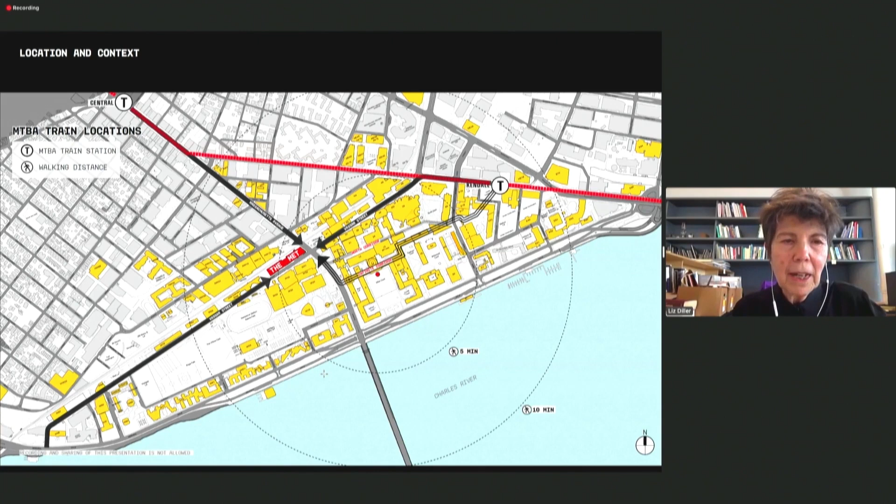As Hashim mentioned, it's sited right in the middle of campus. The prominent location on Mass Ave and Vassar will give the school a very strong presence, right in the middle, with a visible address. This is really the gathering place for all of these various departments, labs, and centers of the SA+P that are scattered all over, now brought into one very dynamic, state-of-the-art educational community resource.

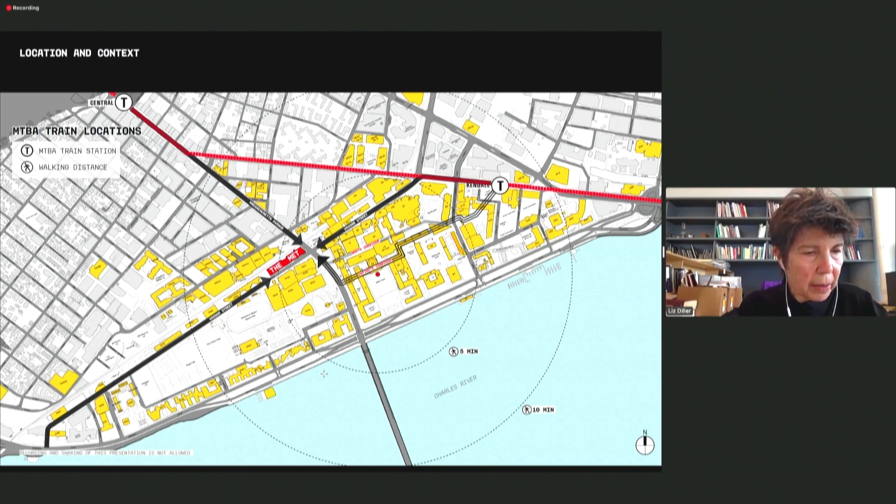I want to show this section next, to show you the character of this building and the challenges there are, but also the great assets. The building is very robust — it's almost an infrastructural cross-section. It has very distinctive masonry and steel hybrid construction, a very tight column grid, low floor-to-floor heights, and very small cellular structures through the building, which gives it a very high load-bearing capacity.

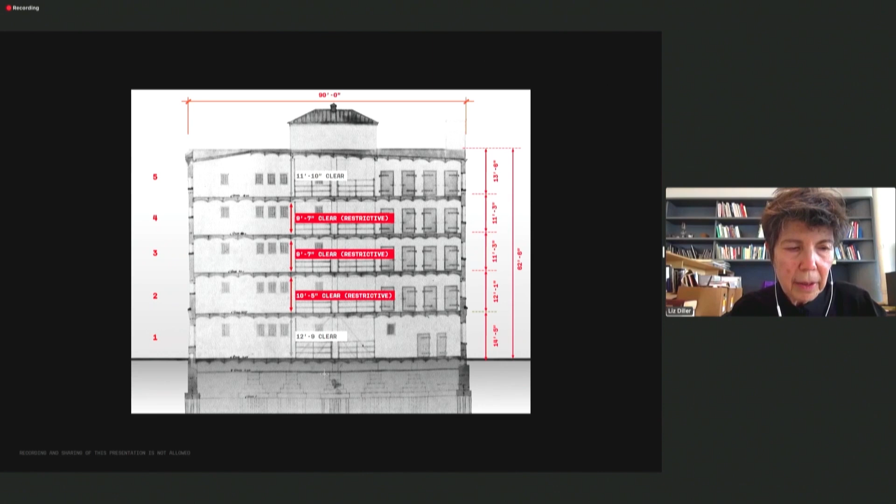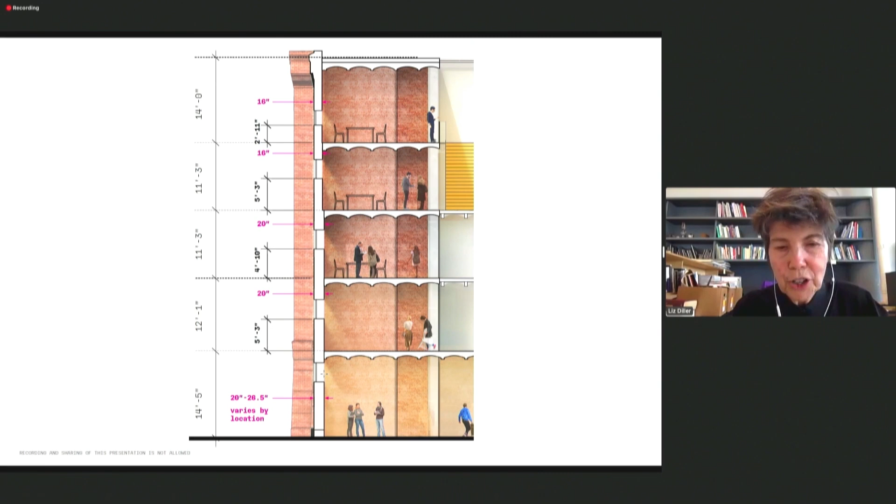The side walls are 2 feet thick, which makes it a great challenge for adaptive reuse as an academic building. This warehouse was designed for storing books, furniture, and pianos, but not humans. Chairs and tables don't require natural light or fresh air, but humans do. These tiny little windows — you see the arched brick ceilings, which are quite interesting — but the windows are very, very tiny, and we have to operate on this building to make it work as an educational facility.

So the effort has been to align the pedagogical goals of the school with this pretty unlikely host. Here, to reinforce, on the southern side of the building, you can see these very small windows that don't bring much light in.

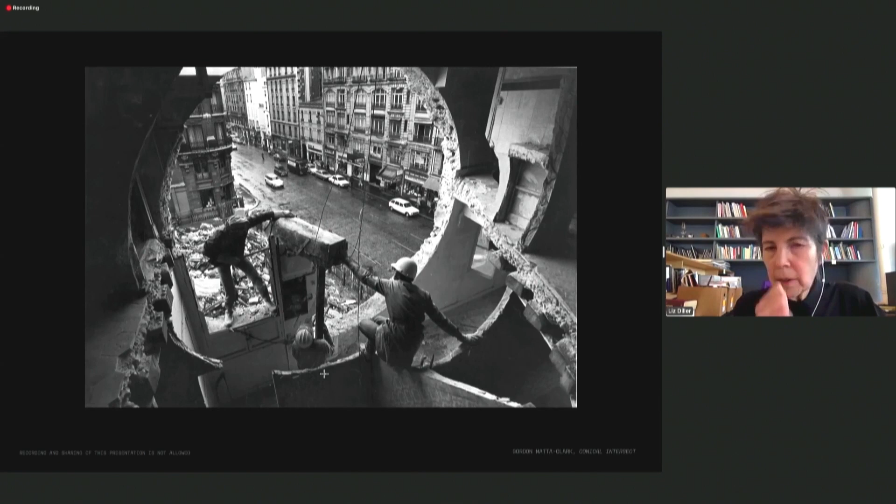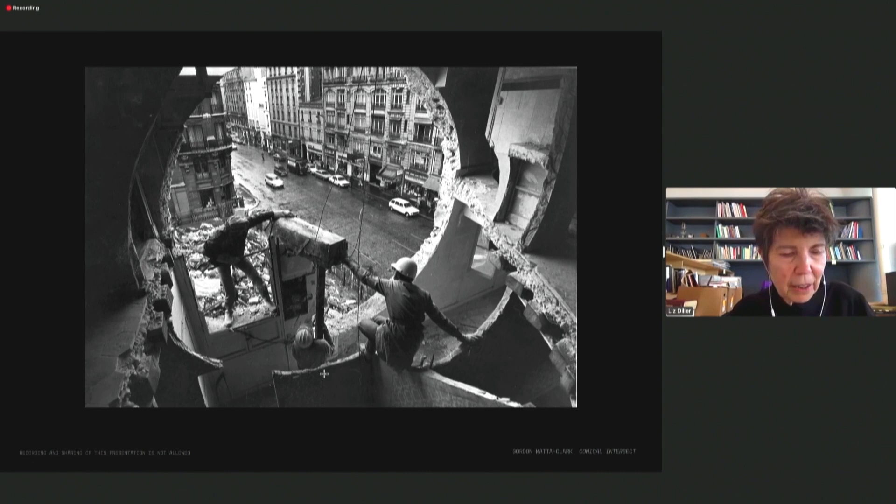For the project, we take our inspiration from Gordon Matta-Clark, and the way he fantastically cut large openings into buildings, for very different reasons than why we're doing it. But this kind of cutting into the existing fabric exposes the building itself and becomes a kind of pedagogical tool — it reveals its construction, but also helps create space and bring in light.

Because of the building's historical significance, the Cambridge Historical Commission asked us to largely preserve the Vassar and Mass Ave facades, and be very sensitive to preserving the building's character-defining fortress-like appearance. It's slightly paradoxical, but it leads to wonderful opportunities — like this kind of surgical cutting into the brick, to bring a window closer to where someone can really look through it, and wider, while showing how the loading of the cutaway brick is distributed through a steel frame, with the window sill sitting on that frame. So this becomes a great pedagogical opportunity.

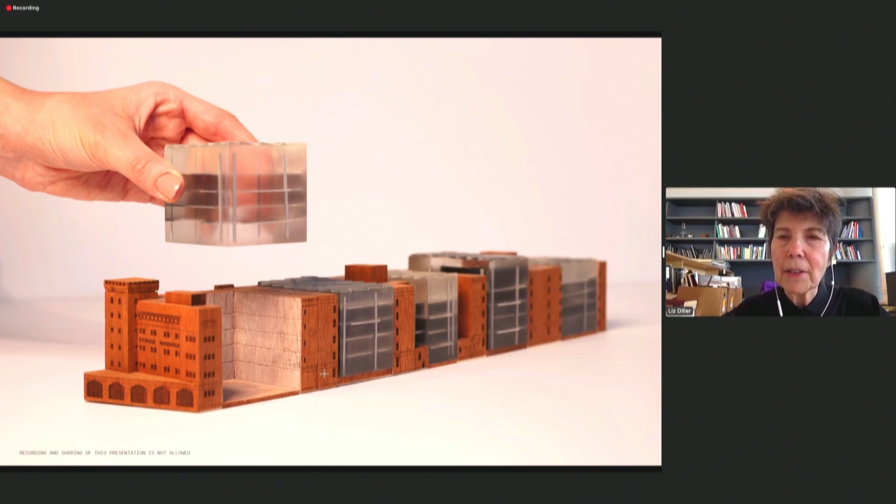And this is, ironically, the southern side of the building where all the sun is. So on the northern side, we have much more freedom to cut away more, cutting away large sections at a different scale.

These large interventions will allow us to preserve the fabric of the existing building, the cellular fabric, for some of the programs of the school, but also to allow large, uninterrupted, tower-like suspended studios that are state-of-the-art, suspended from the structural brick. These are column-free and will support lots of loading as well.

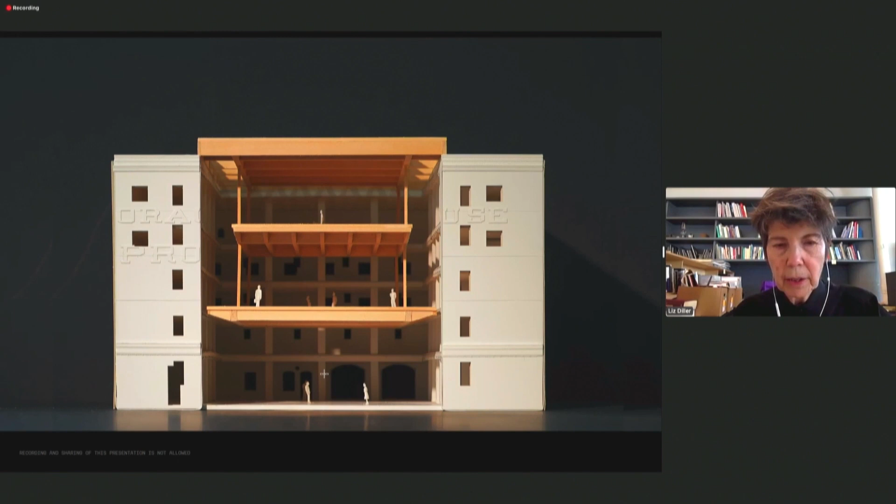But very airy, open, and open to light. There's always a kind of slot of space, very big on detail on this project, to always articulate the difference between the new and the old buildings.

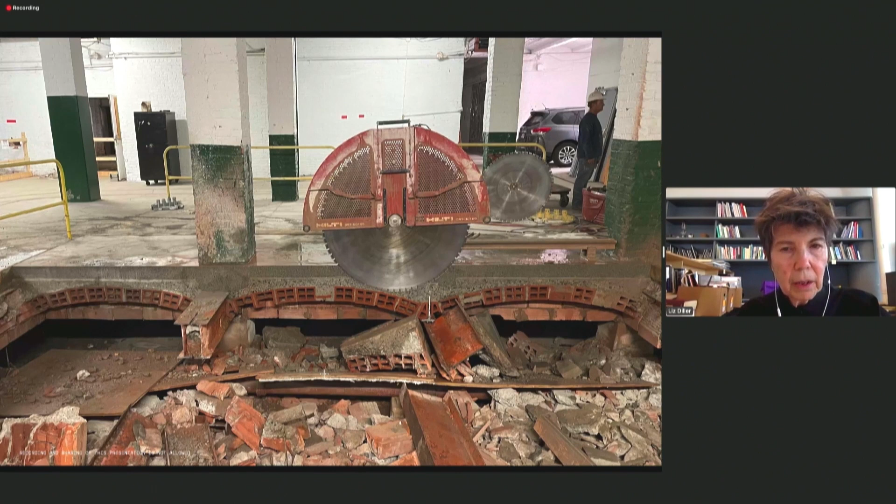So maybe I'll end here and just show this. The project is really very much in the making, right on site as we speak.

Because we have a pedagogical mission also on the site, we are cutting and exposing that. This shows you an experiment—we wanted to make sure that these mock-ups, basically mock-ups in reverse, maybe mock-downs, test the literal cutting of the building. So far, the building is holding together as expected, revealing some beautiful cross sections, which we mean to expose.

And not smooth over. So we believe that the new MIT warehouse should be as much an instrument of education as the curriculum is.

And to take this the next step, I want to introduce Ben Gilmartin, who's going to take you deep into the building. Ben is my partner and has been leading the day-to-day efforts of this transformation.

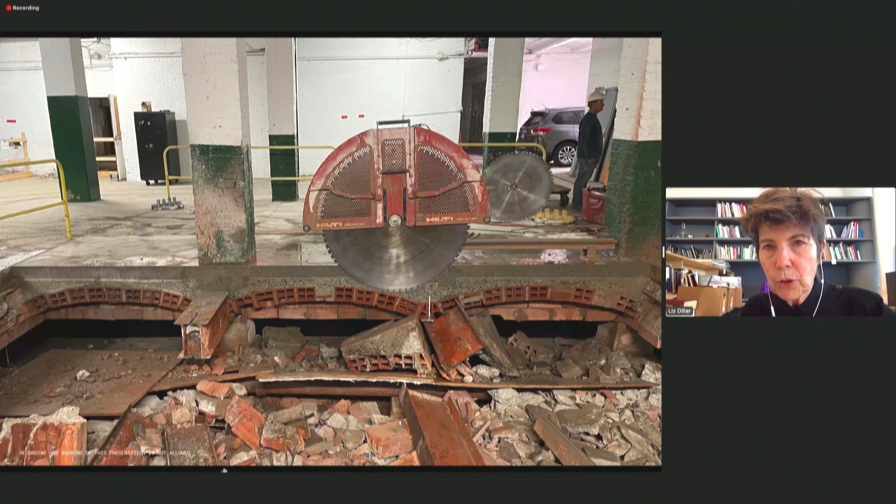Thank you all. Thanks, Liz. Oops.

Okay, so I'll go through a detailed walkthrough of the building design as it is today. Obviously, it's still a work in progress, but construction is going on site. I'll elaborate on some of the points that Liz has made and then talk about the spaces throughout the building.

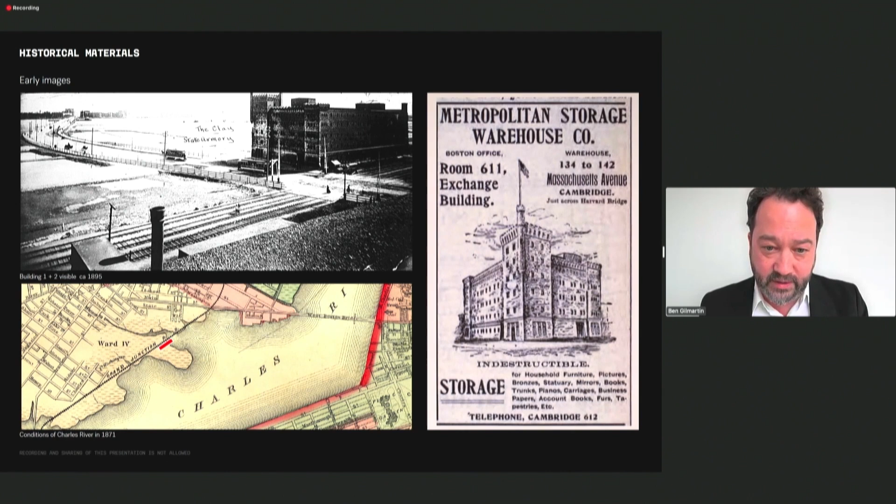Reeling back once more to the history of the building—it's interesting because when it was built, it was on the Charles River, and almost all of the Institute as it is today is on landfill that's filled in between the river and the building. So it was looking across the Back Bay, advertising itself to people in Boston to come over and use it when they did the grand tour of Europe and other things.

As Liz mentioned, it was built in 5 stages successively, the first by Fred Pope, and then subsequently by Peabody and Stearns over about a 25-year period. It has a length of about 530 feet by 90 feet wide—quite a massive building.

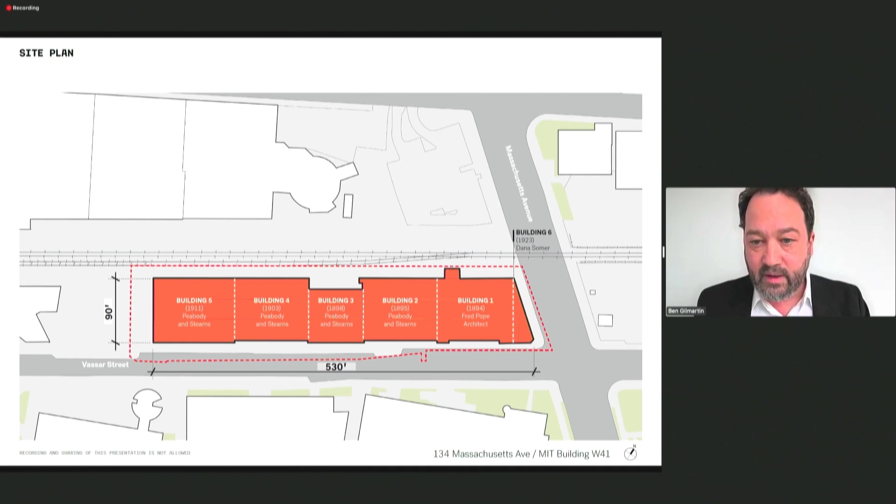The stages or additions of the building are very significant to our design. It has a very prominent primary entrance on Mass Avenue, and secondary entrances along Vassar Street that correlate to the main lobby, to Project Manus, and to the Morningside Academy, among other uses.

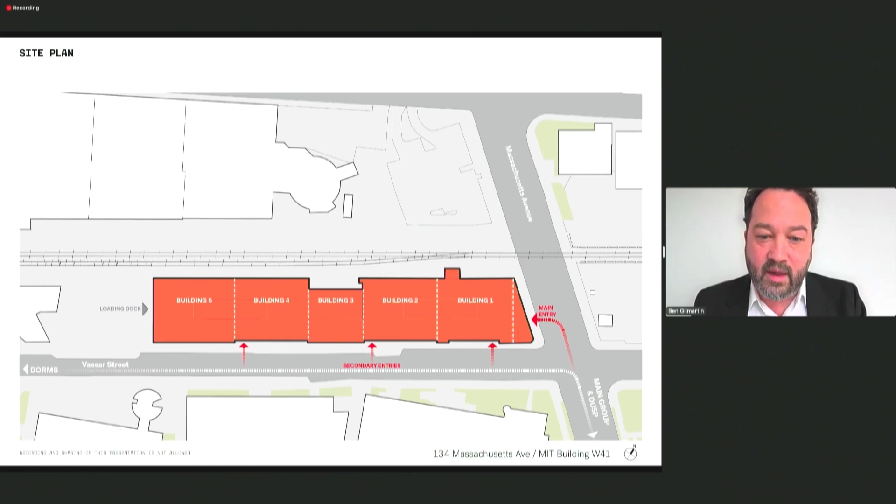If you take a diagrammatic cut through the building, like a section from east to west with Mass Avenue on the left, this diagram simply shows the program stacking in the building as it is today. So you see the 5 building additions on the bottom.

And the yellow spaces at the east end show the entry lobby, the commons in building 2, the auditorium, and at the lower levels, continuing on Project Manus and loading areas.

Going up from there, the shop spaces are in the west end of the building. At the upper levels, bookending the building in Building 1 and Building 5—in Building 1 would be supplementary DUSP spaces and administrative spaces along Mass Avenue, and in Building 5, the new Morningside Academy in the upper floors. All the spaces in the middle upper floors are principally the Department of Architecture spaces.

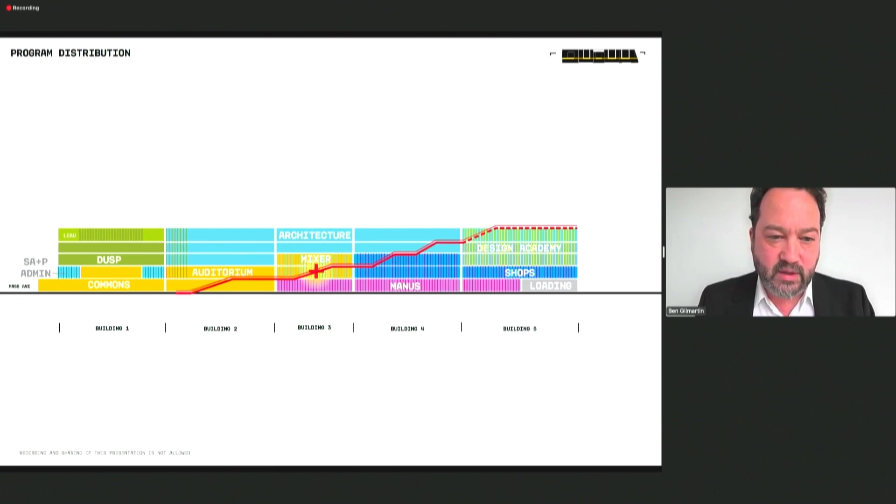And in the heart of the building is what we call the mixer. It's a convening space for the entire community of people using the building. There's a diagonal connector that connects across all the buildings, a grand stair that traverses the building.

As Liz mentioned, the primary facades of historic importance are the Mass Avenue and Vassar Street facades, and we had to work very surgically on those facades.

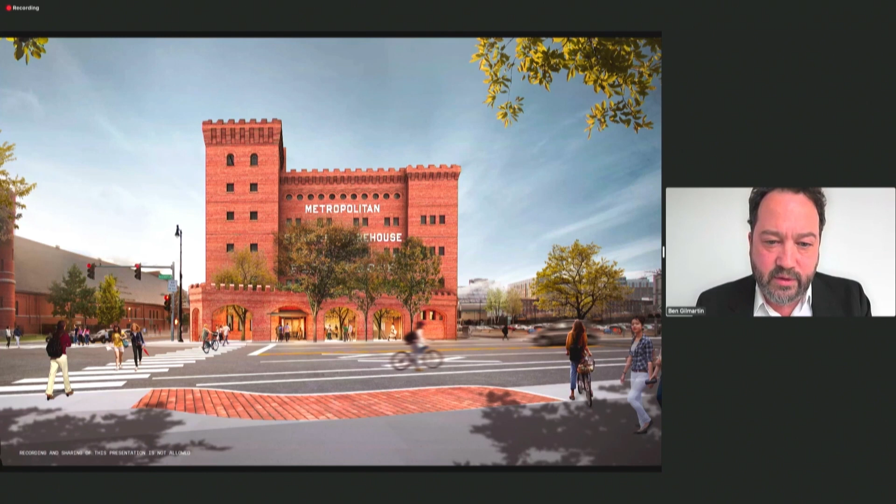Here's a representation of the Mass Avenue exposure of the building. We retained the portico in front and restored much of the historic detail of the facade. But behind the portico, we undercut the building to create transparency through from the street right into the lobby, as a kind of layered invitation right into the building for the public.

And a blade canopy emerges from the entrance doors and lodges into the spring points of the arch, the second arch from the south, signifying the entrance to the building. Liz also mentioned the surgical approach to introducing new fenestration to the southern facade along Vassar Street.

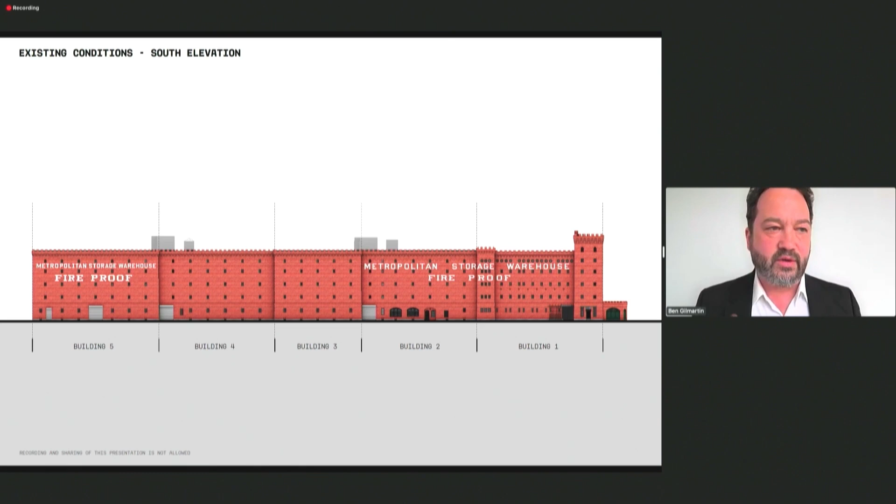Principally at the street level, we're restoring the historic detailing and windows there, but to introduce new entrances, we're simply introducing them at points of entry that already exist with glass apertures. As Liz mentioned, the existing array of windows is too far apart and too high for the contemporary use of offices, say faculty offices or other teaching and support spaces.

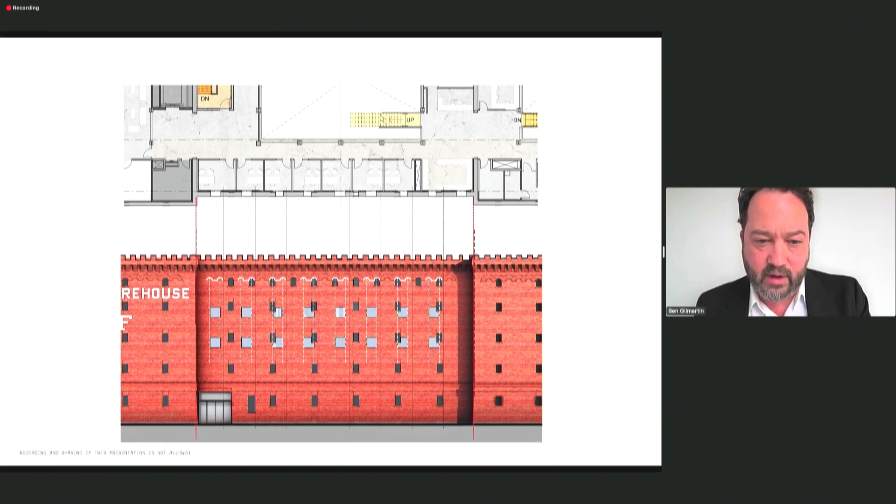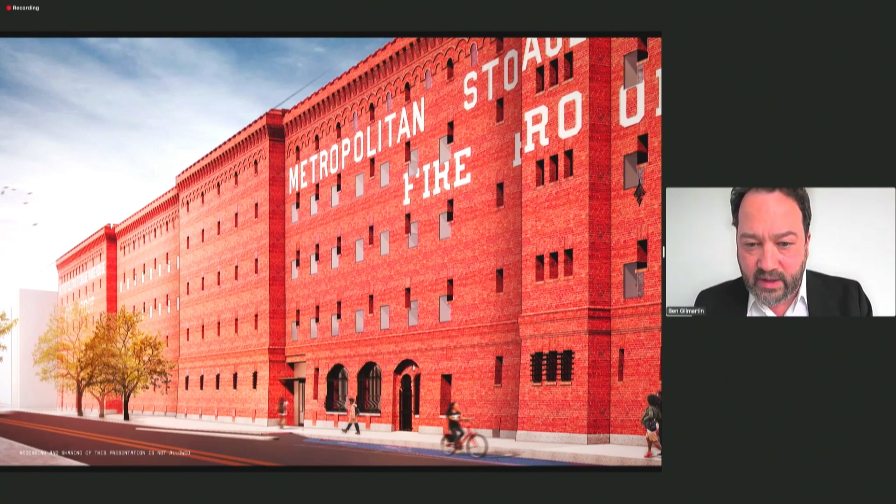We picked up detailing at the cornice and used it as our regulating grid on the facade. That array of windows interacting with the historic punched openings created the interlock window details, and the sill height of the new window is at the work surface height, while the historic window is high in the space. That creates the expression of the facade, which we think is subtle, but speaks very much about the relation between the contemporary and the historic as the building moves to its new use.

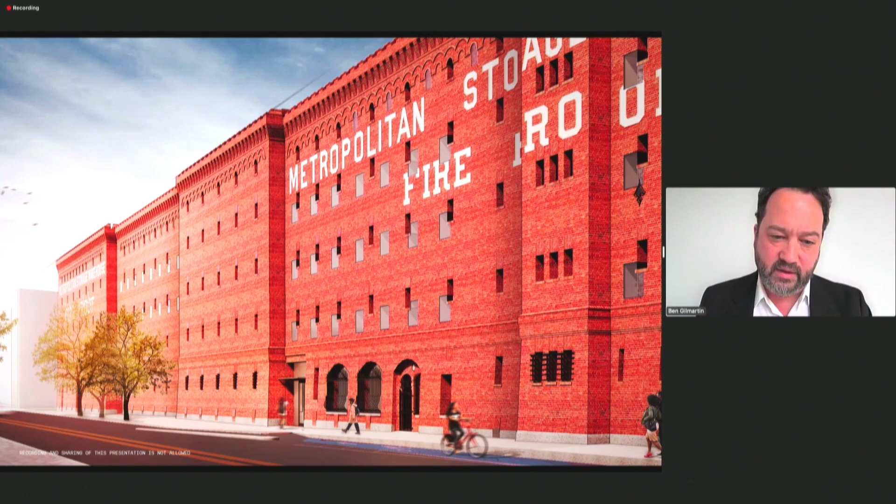Again, along the street, a lot of the traditional details are restored, but at the entry points, new glass infill is created to draw the public in, to create an invitation to the street. There you see the view from Mass Avenue and Vassar Street. So very subtly transformed, but in a way that we think is quite inventive and speaking to its contemporary use.

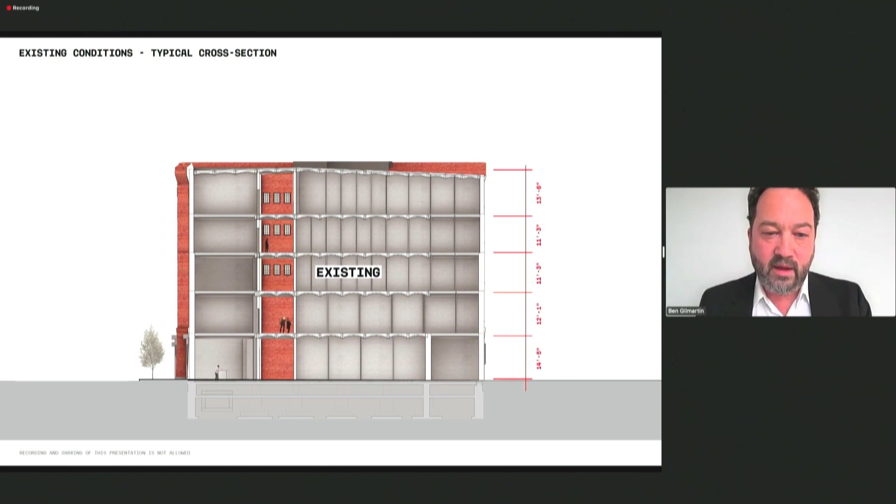As Liz also mentioned, the historic structure within has a high density of columns, and the arched structure creates low clearances within, with quite a robust capacity for supporting loads. But our gesture of cutting out from the north a significant portion within the floor plate enables the insertion of new platforms that provide studio space, double height studio spaces. The interaction between the existing and new is separated by a skylight overhead that brings daylight down from the south, and the north is a full curtain wall exposure of north light.

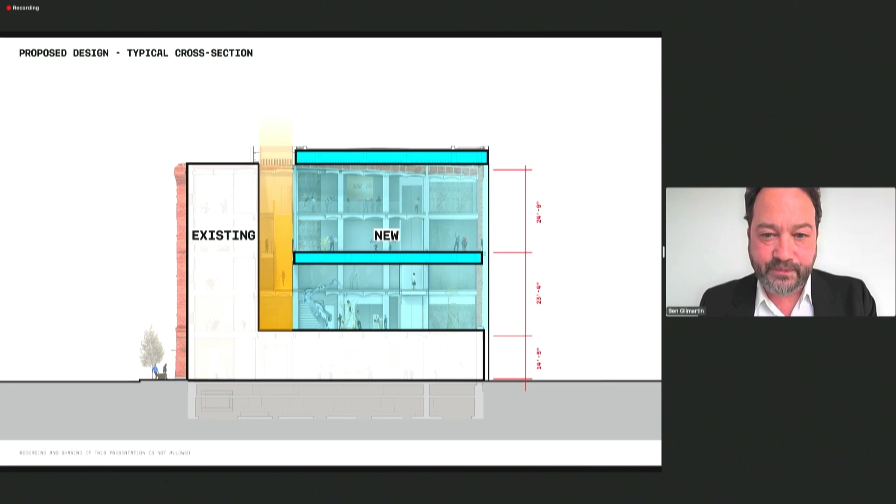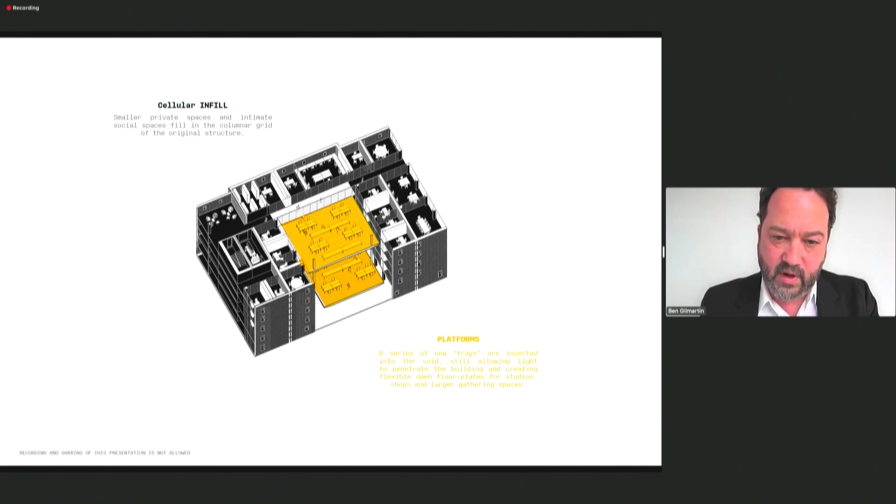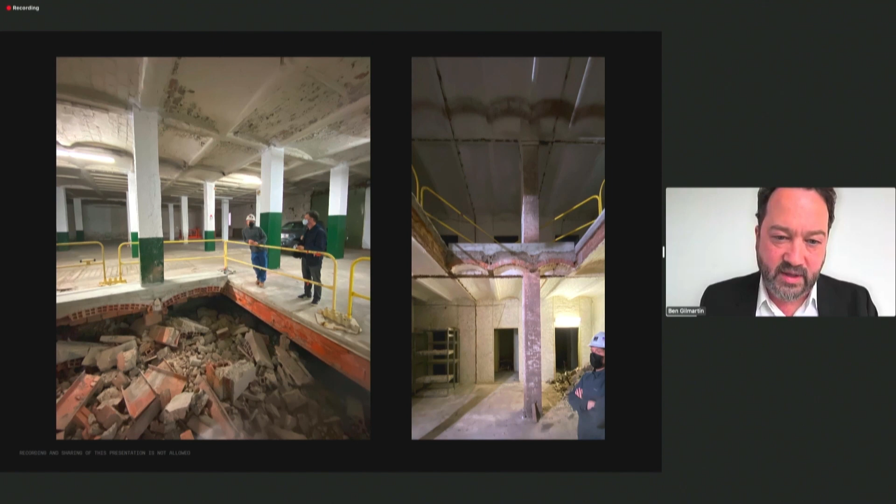Liz showed these cuts that are being tested and undertaken throughout the building as the demolition is occurring, a means of revealing the technology of the day and the construction of the building historically as part of its expression within. She also showed the new insertion of the platforms as hanging structures, so that there are heavy beams that span across the roof and bear on the existing columns and perimeter structure of the existing buildings, and then very delicately hang from the top to create these airy double height labs and studio spaces.

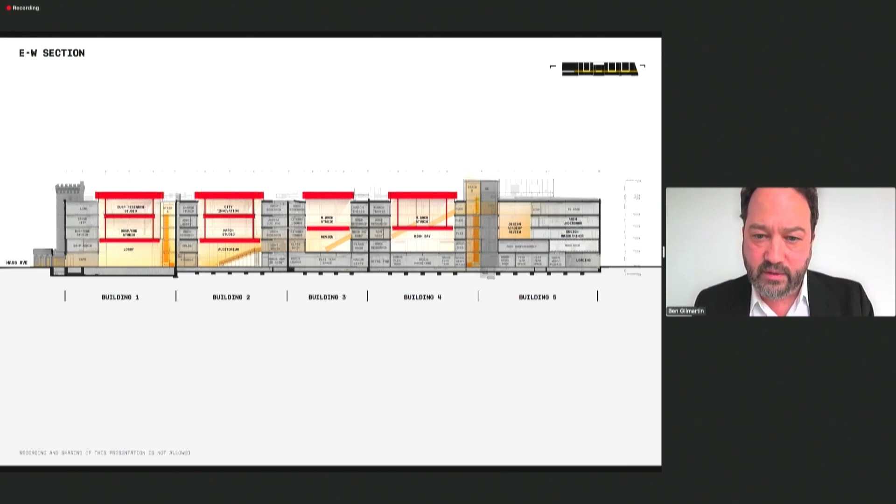At the ground floor, there is a continuous corridor that takes its inspiration from the infinite corridor as a kind of extension of that idea to the south through this building. And that would connect all of the public spaces at the ground floor.

The diagonal stair that we're indicating here in yellow with a kind of red dashed line is the slow connector through the building that students and faculty would use to traverse the building's levels. Then there are cores at building 1 and building 4, 5 that form fast ways up and down to get to all the levels of the building quickly.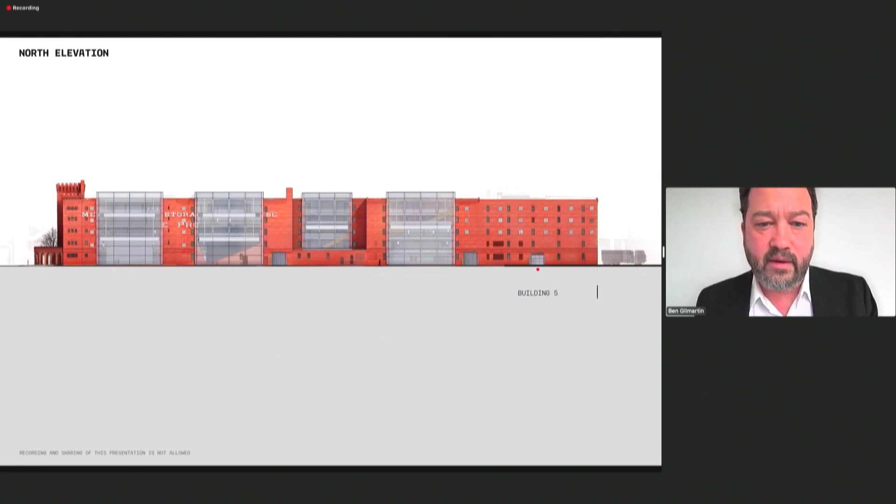At the auditorium space in building 2, you see a V cut, which is a special cut that actually follows the seating rake of the auditorium inside, and I'll talk about that in a minute. This is just a northern view of the building as you would approach it on Mass Avenue coming from the north across the Grand Junction.

Going through the plans at the ground floor, Mass Avenue on the right with the large red arrow is the primary entrance coming into the central lobby, or the main lobby. This is a very public space that greets everybody from the Institute and the public, a convening space for everybody who uses the building.

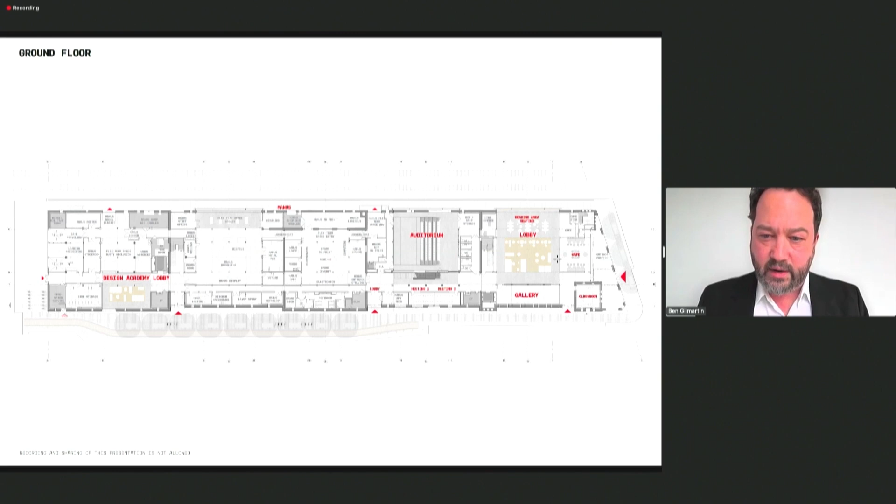Organized at the ground floor along a kind of main street, or an extension of the Infinite Corridor, are the lobby, the auditorium, and two building bays of Project Manus space, and then the entrance to the Design Academy to the west. You see secondary entrances along Vassar Street to each of those spaces.

This is just an enlargement of the lobby area, showing where we are in terms of thinking about this as a space. It's really trying to do a lot of things, to host an incredible number of activities and be a place where everybody gathers throughout the year for many different reasons. At the heart of it is a very flexible space that can be a hangout, but also a place of exhibition or presentation, a place for community convening or gatherings.

It's activated by an art gallery to the south, a cafe to the east that opens also out into the portico space, and a library outpost to the north with a reading area.

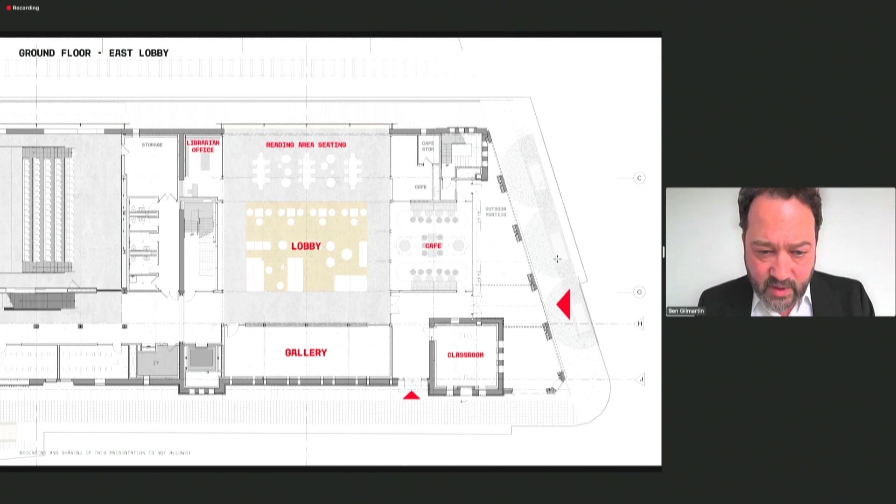This is just a notional representation of that space in progress in day-to-day use, but just the feeling of it as being a space that's very comfortable, bright, informal and engaging and inviting, that typically is a place to hang out, but it could also alternatively serve exhibitions or even pinups and presentations.

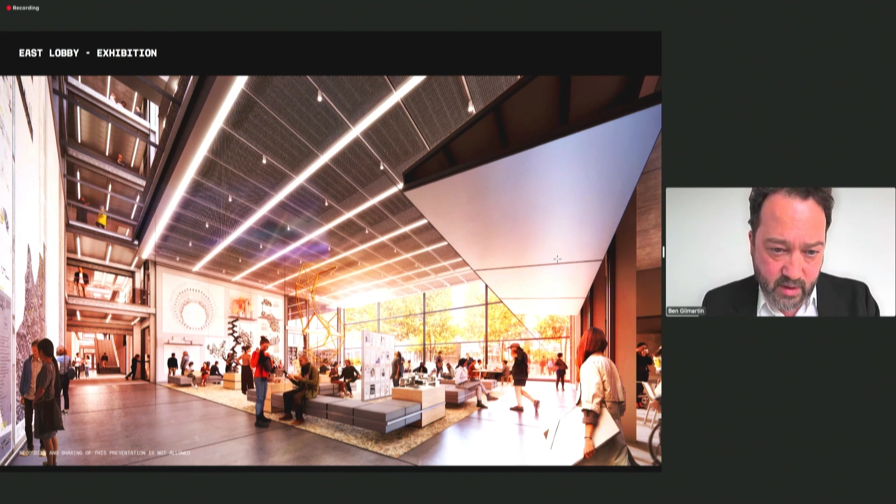It also has projection and AV equipment to stage simulcasts of lectures or projected events, and community engagement functions.

In building 2 is the auditorium space as you continue along the corridor. There's a large window, basically at the presentation side, that can be blacked out for media, but it can also be left open and acoustically form a barrier, while revealing the activities going on inside.

You see the grand stair on the left, which throughout the building we express as a kind of cold rolled steel member that simply tips and falls into place. Very elemental, and its impression here on the auditorium wall creates a subtraction, a discrete diagonal window that allows people coming down the stair to peek into the auditorium space with minimum distraction to people inside.

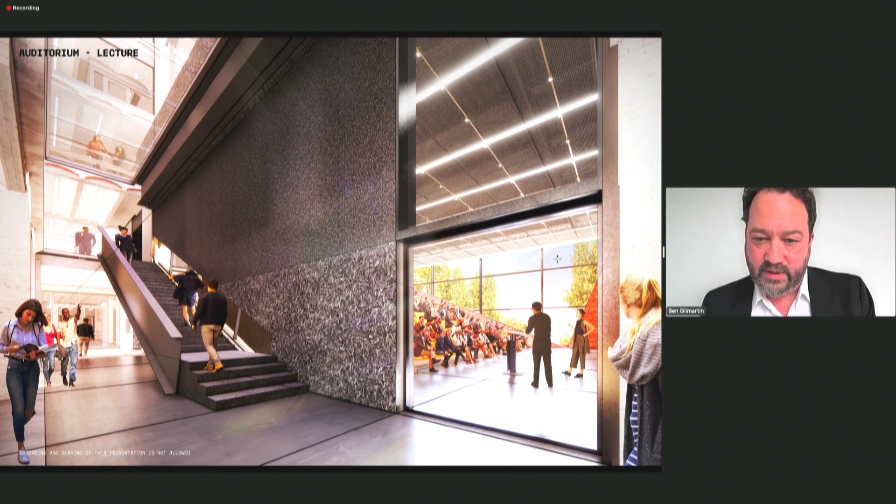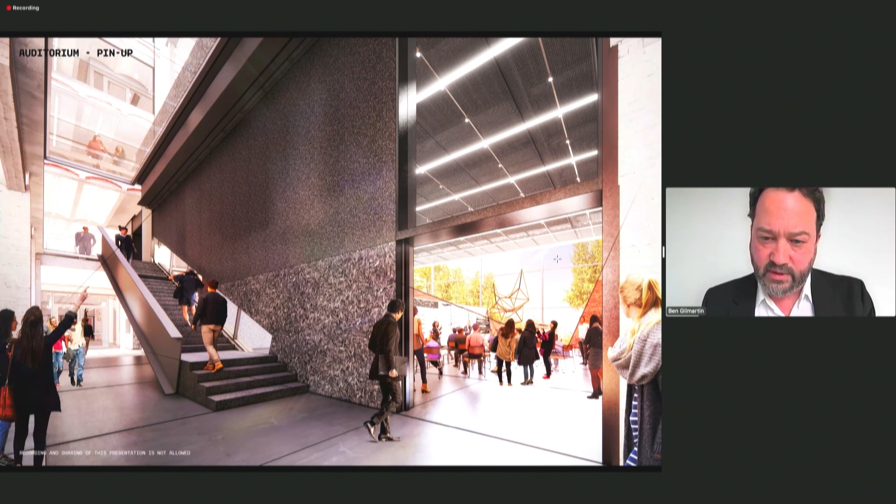The wall at the auditorium to the right can also be operated open to open the space up for the public to come in, and the seating risers can be retracted to create a flat floor pinup space, or use it for events and other functions. This is just a representation of the auditorium space in a lecture setup.

Continuing to the auditorium in building 2 on the left, continuing along the diagonal stair to the second floor, in building 1 are the administrative spaces, the dean's suite, the upper floor of the auditorium, and collab. At the heart of the building is what's called Review, but it's the mixer space. Then going to buildings 4 and 5 are the shop spaces, including the high bay shop.

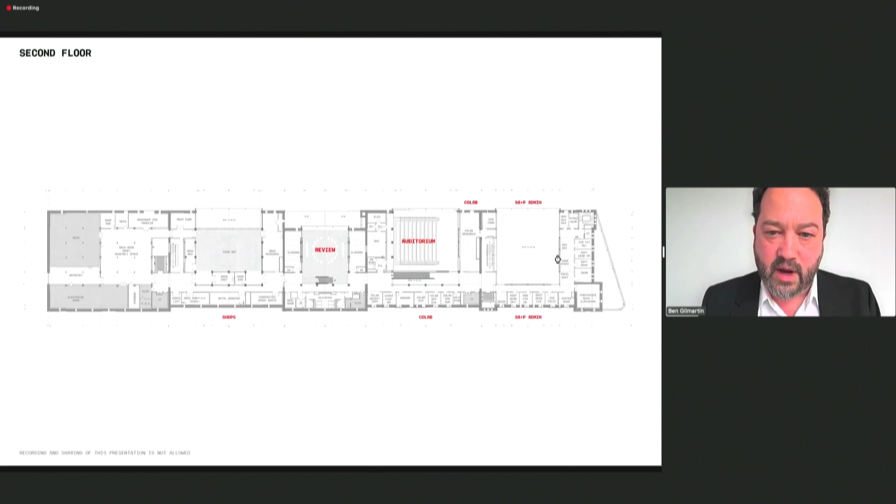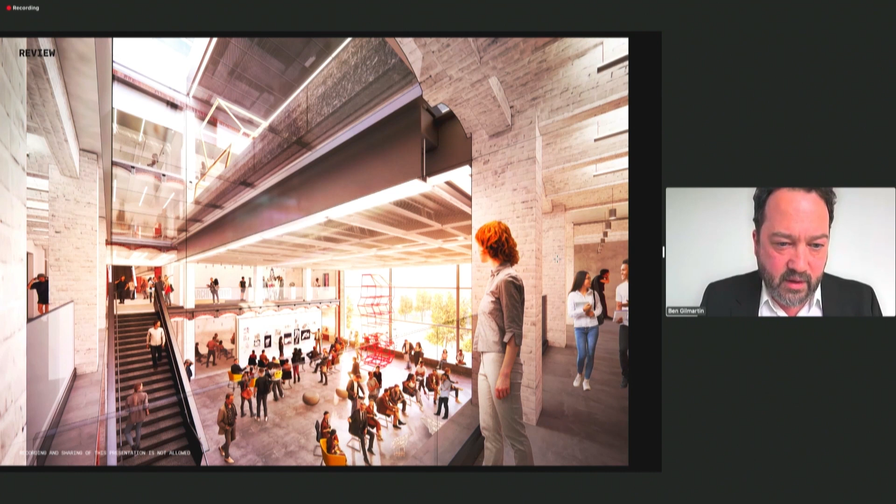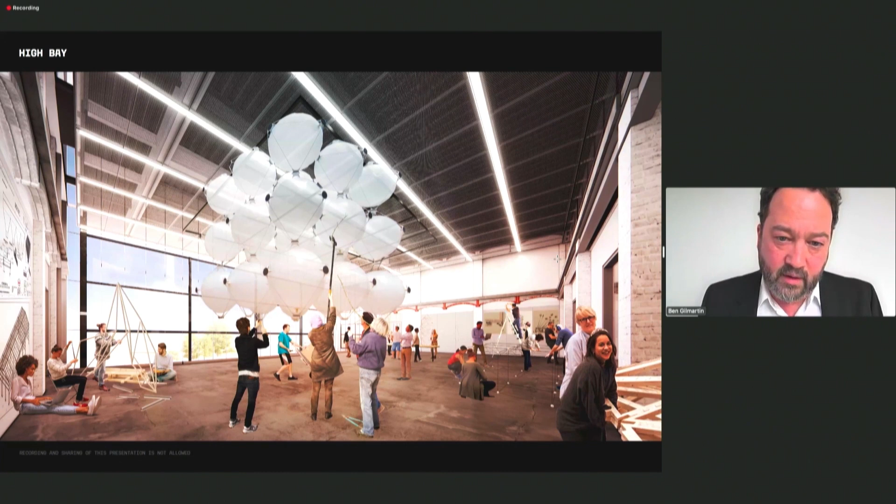This is jumping over into the high bay space, which is a very large volume space in the shops area for large assemblies and projects.

The 3rd floor from east to west has DUSP and CRE studio spaces, MArch studios in building 2 with some DUSP research and architecture research in classrooms. In building 4 is architecture headquarters with a small presence, as mentioned, in the 3rd floor of the mixer area. And in building 5, you see the beginning of the Morningside Academy for Design.

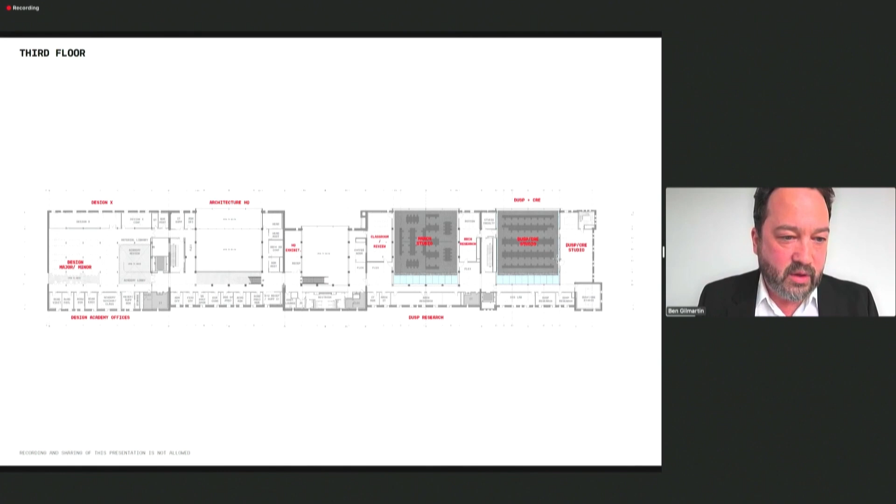This is its primary entrance point within the building, and it includes design major and minor, Design Academy offices, and Design X.

This is just a detail at the MArch studio spaces where you see that glass joint, between studio, the new structures, and the historic structures, a daylight gap that runs all the way through the building and expresses a separation between new and old, and their interaction with each other.

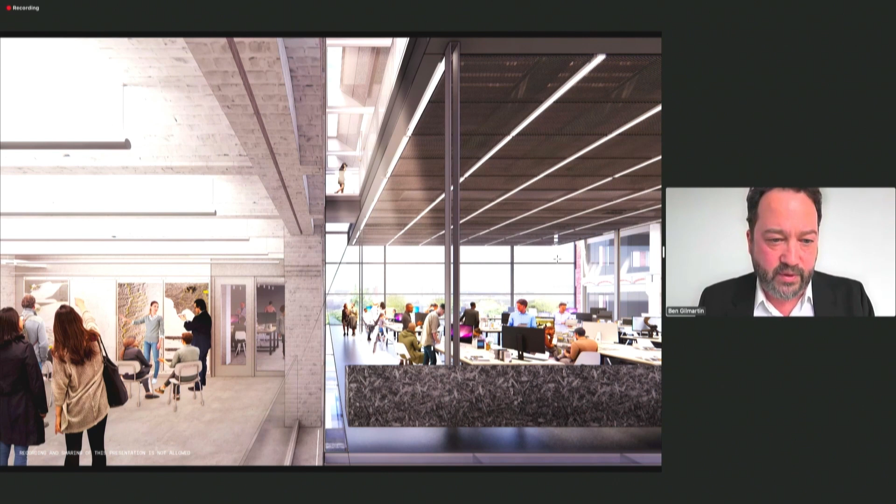At the 4th floor, to the east in building 1 is the Senseable City Research Lab, Aga Khan, and the History, Theory, and Criticism departments. In the heart of the building, buildings 3 and 4 hold the primary MArch studio spaces at this level, along with the A+U faculty. In building 5, at the Morningside Academy, are the architecture undergraduate studio spaces.

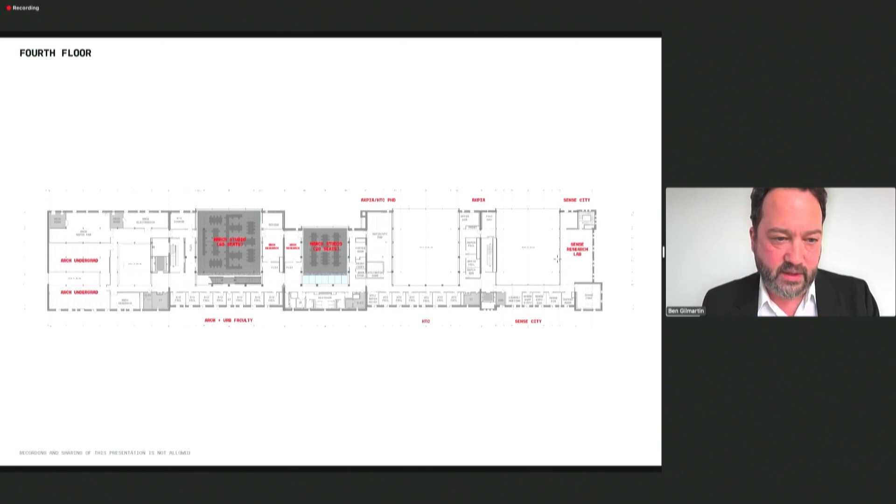This is in building 3 or 4, the MArch studio space. As you're ascending the grand stair, looking across the studios, the furniture will ultimately be different than this, but you get the feeling of the energy, messiness, and creative vibrancy of these spaces.

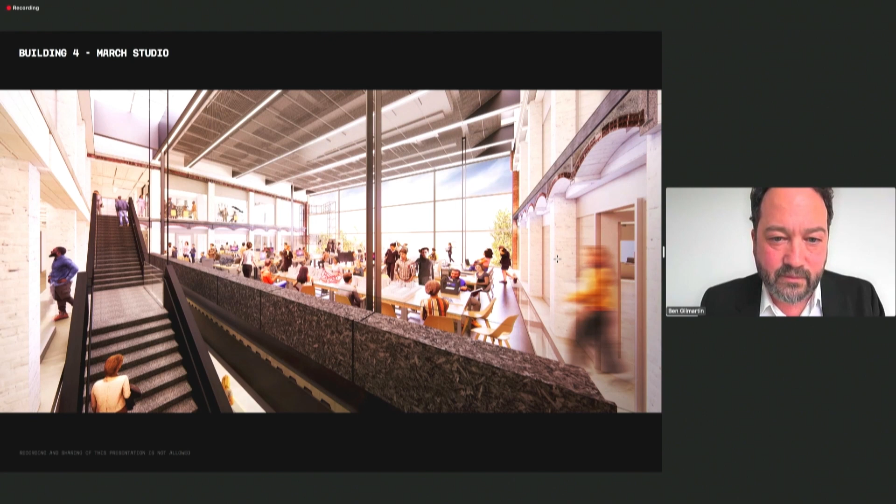At the 5th floor, again to the east, is LCAU, the Leventhal Center, and DUSP Research Studios. In building 2, the City Innovation Lab and SMArchS, plus additional architecture research spaces and MArch thesis spaces. In building 5, computation and building technology. Finally, to make fenestration in the west elevation of the building, we use another form of cutting, which is coring.

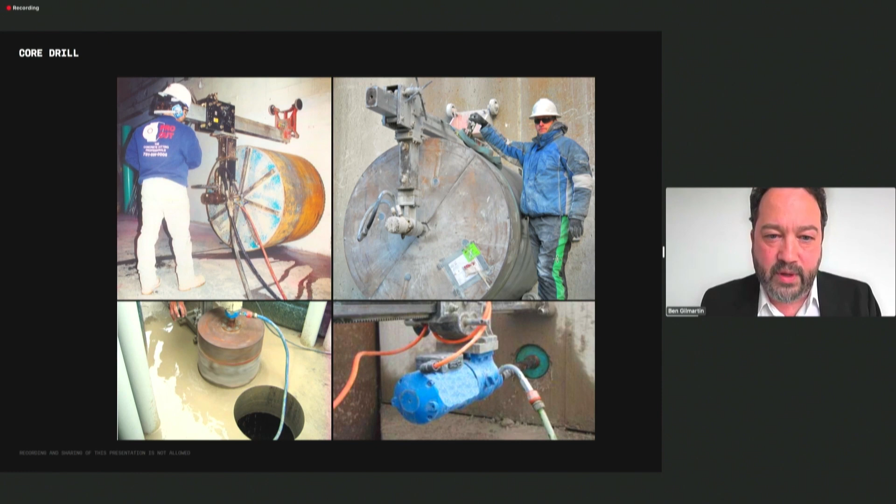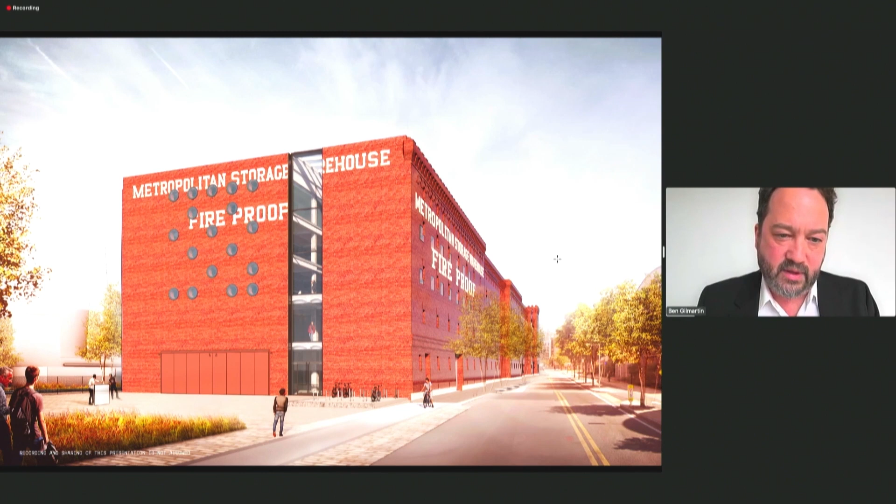In addition to a large cut that goes from top to bottom of this facade, extending the skylight that runs through the building down to street level and making a secondary entrance at this approach, the coring holes create daylight apertures in this facade, placed where they're required programmatically for each level of the building going up.

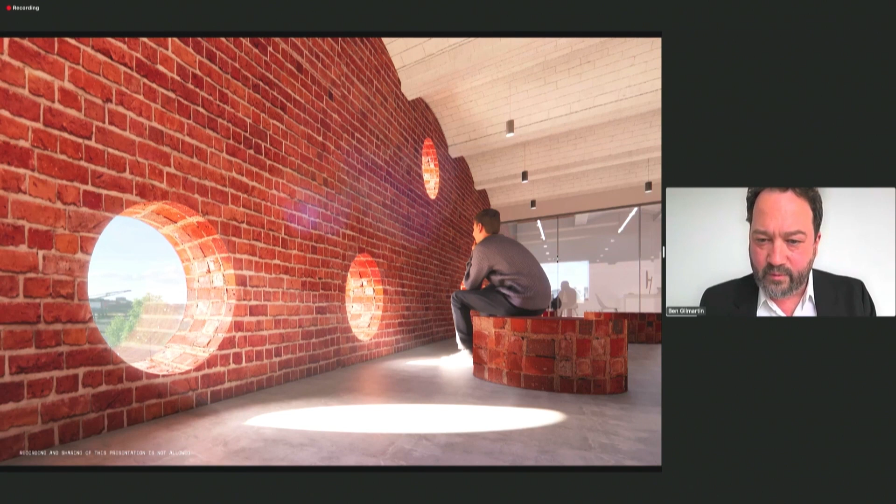This just shows our impression of those bore holes, where one of the corings is retained as an ottoman next to the window.

And finally, looking at the Morningside Academy, this is something we're really excited about. It came into the project in about the last year or so. This is the 3rd floor, an enlargement of the entry space for the Design Academy, with design major and minor studio spaces, offices, and support areas, with Design X to the north. In the center is a convening space that's a kind of counterpoint to the main lobby—smaller, but highly flexible, a place for coming together that can also serve lectures or reviews.

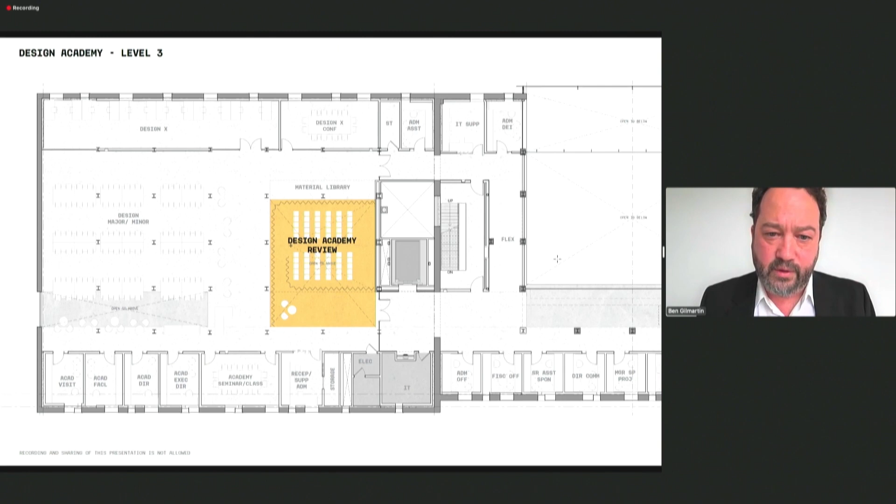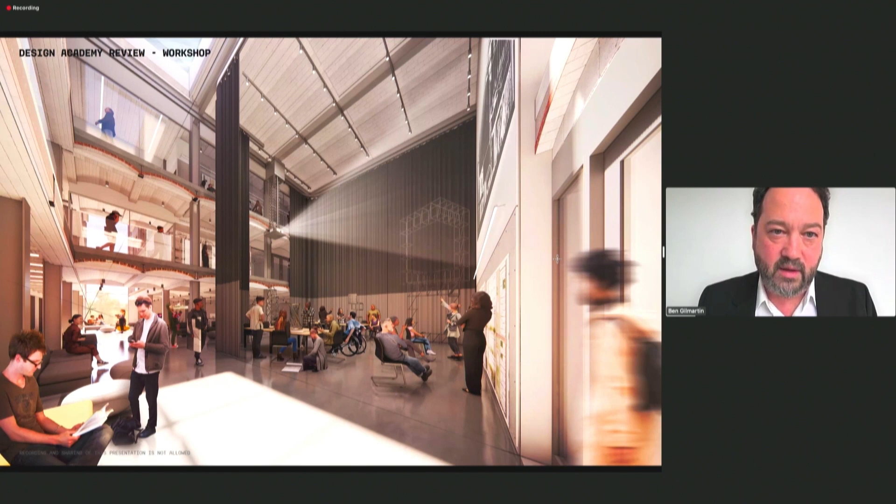This is just showing an impression of that. It's a 3-story tall coring through the middle of the building that brings all of the levels together, with AV pinup space, furniture and projections, and a curtain that serves as an acoustic and daylight enclosure that can be opened or closed to create effectively a classroom or presentation space.

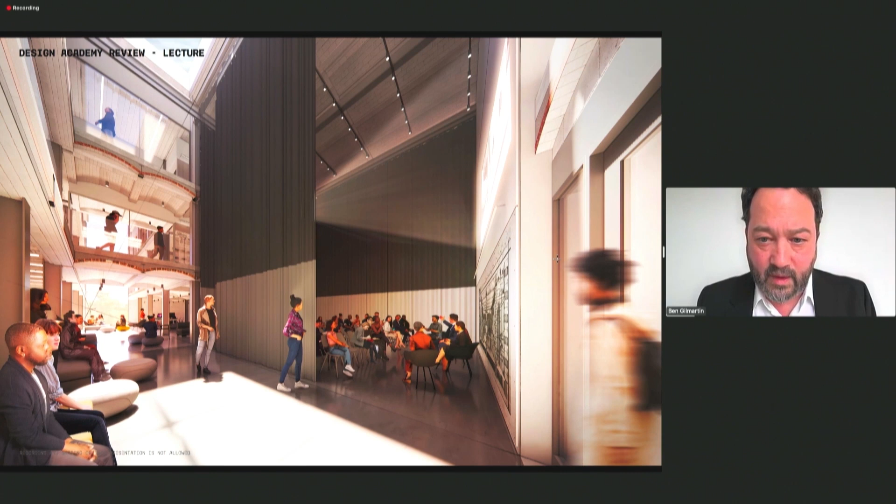So that's largely my overview of where we are with the design of the building. I just wanted to leave with one last coda. There was a sketch that I did with our submission before we were selected for the project, and it's really just a reflection on the aspiration of the building to work at many, many scales.

So I'm reimagining the meaning of the sketch, beginning with the brick as something that has embodied carbon, but also an embodied piece of history. The building is a kind of radical proposition that the future of design is embodied by adaptive reuse rather than a new tabula rasa building—one that, within the campus triangle of the future, sits squarely in the middle and invites everybody in to participate in the idea of design and cross-disciplinary design collaboration.

At the scale of the city, Cambridge and the city are invited in as real participants in the work that happens here collaboratively, as a true engager of real problems in the world. Ultimately, the research that goes on inside—the vastly expanded research space available, in addition to the Morningside Academy—makes it a global leader in thinking about the art and science of design within the global community of institutions engaged in these activities.

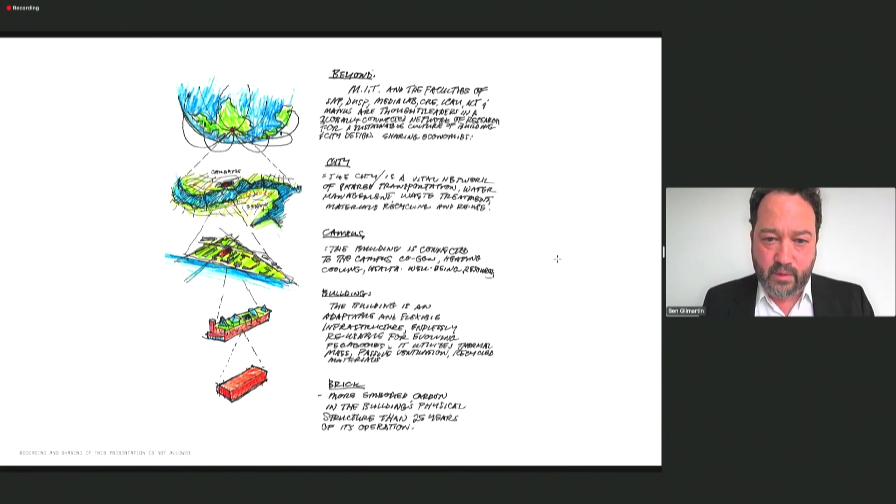So that's our design overview. I'll hand over to Nicholas de Monchaux, the head of the department. Thank you.

Nicholas, you're muted.

You think I would have learned how to use Zoom by now, especially since I started this job June 1st, 2020, at the very beginning of the pandemic, but apparently that hasn't happened.

It is a real pleasure to be here with so many of our alumni today. Because I started during the pandemic, I haven't yet had a chance, both as head and here at MIT, to meet as many of you as I would like, but it's a particular pleasure to meet over architecture and around the idea of architecture. This work together, this kind of collaboration, is also particularly enjoyable to me for two reasons.

It's been amazing to collaborate with all my new friends and colleagues here at MIT and in the department on how to best live our values in the design of this building. And it's also been a real pleasure to collaborate with Diller Scofidio and Renfro, where I spent an influential part of my own career a couple of decades ago.

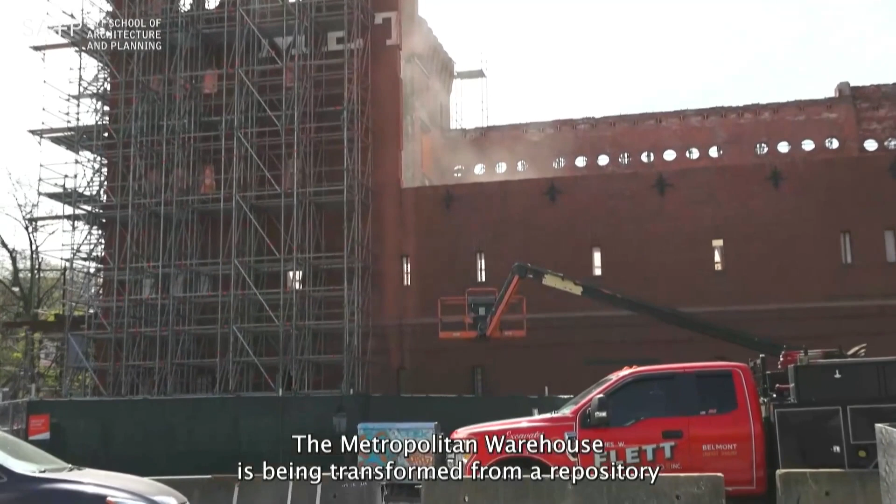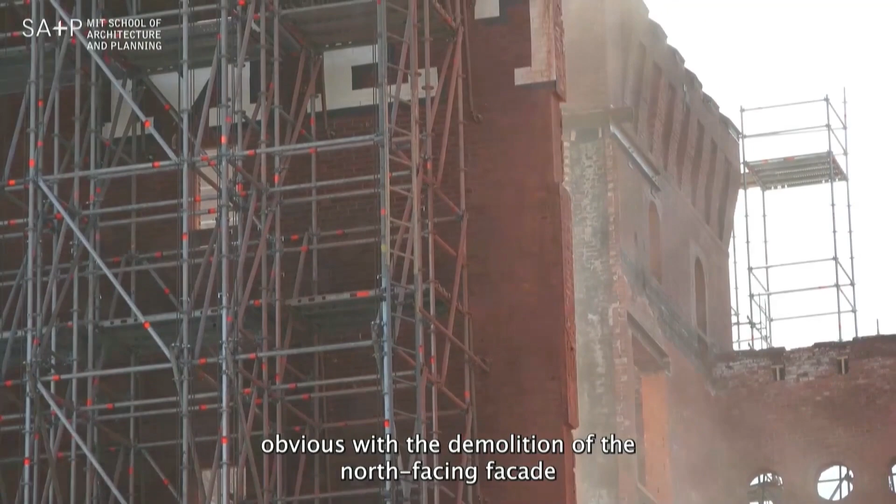If you got into architecture because you love construction work, or into real estate development and urban planning because you love watching cities be transformed, this is your project. The Metropolitan Warehouse is being transformed from a repository and vault for stuff into a place where people can meet, work, and learn. For the first time, passers-by on the street can see the change becoming obvious with the demolition of the north-facing facade here in the first section of the building at the Mass Ave end. The demolition work is being done by Local 151, the laborers.

There's a lot of exciting structural work underway in the building right now, so let's go take a look.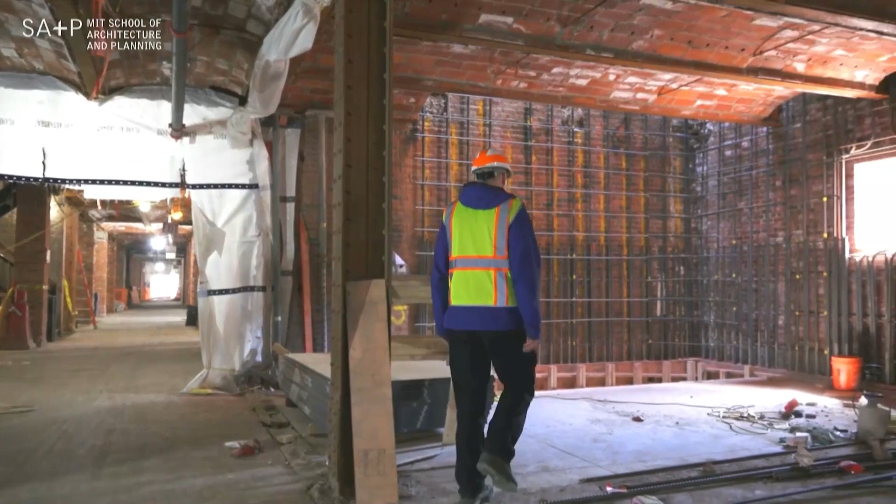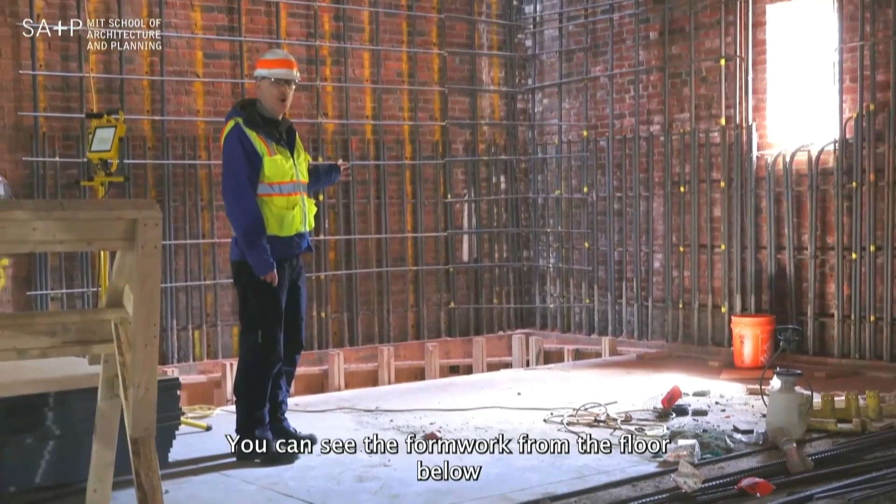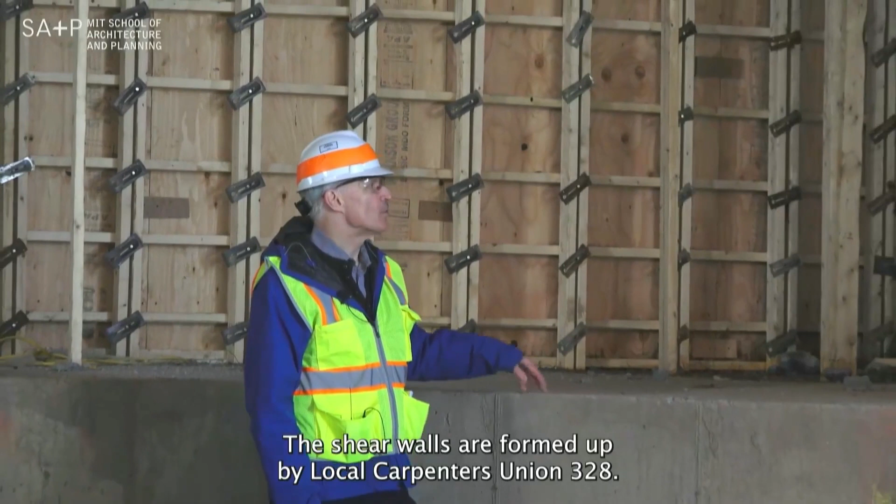We're now on the second floor at the west end of the building, the fifth section. Each of the 5 main sections of the building has L-shaped shear walls inserted at all 4 corners. This area has been prepped with rebar set by the Ironworkers Local number 7. You can see the formwork from the floor below, where the shear wall has already been poured. The L-shaped shear walls land on concrete pile caps, which are supported by pilings that go straight down to bedrock. The shear walls are formed up by local Carpenters Union 328. My stepfather would have been proud.

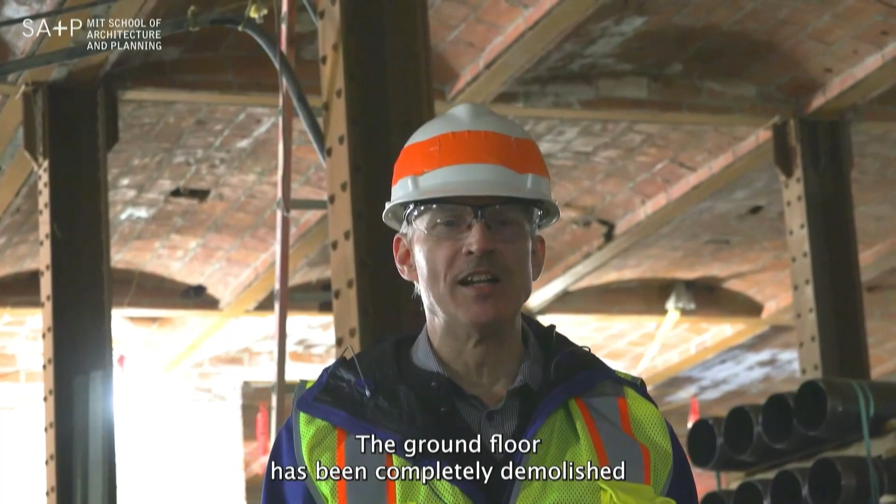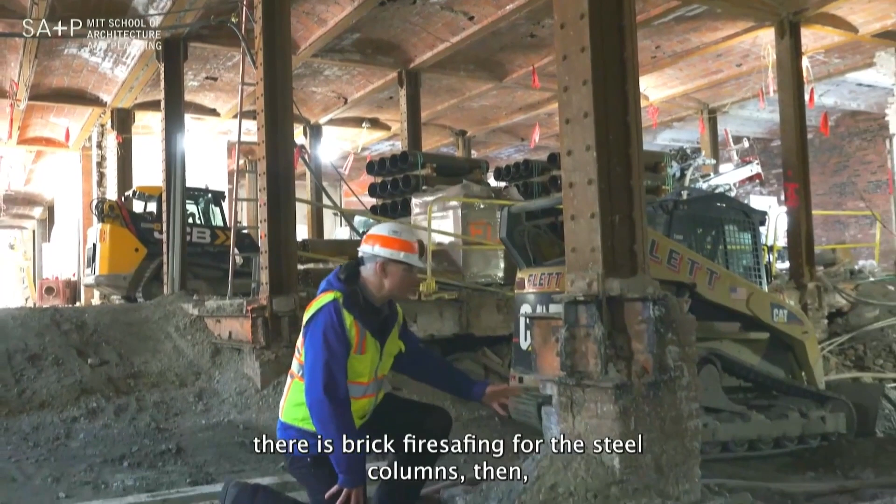The ground floor has been completely demolished to reveal the original column structure where it meets the foundation. The original foundation's pyramidal granite slabs rest on wooden pilings. Above the pilings, there's brick fire safing for the steel columns. Where the original floor beams have been cut away, it leads to a gnarly situation. We do have a detail for dealing with this, but some of these cases have led to RFIs from the contractors, as you can probably imagine.

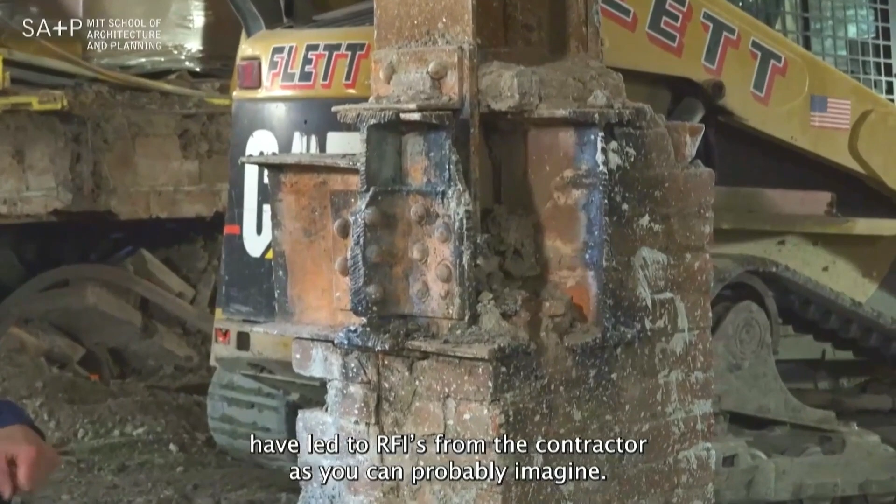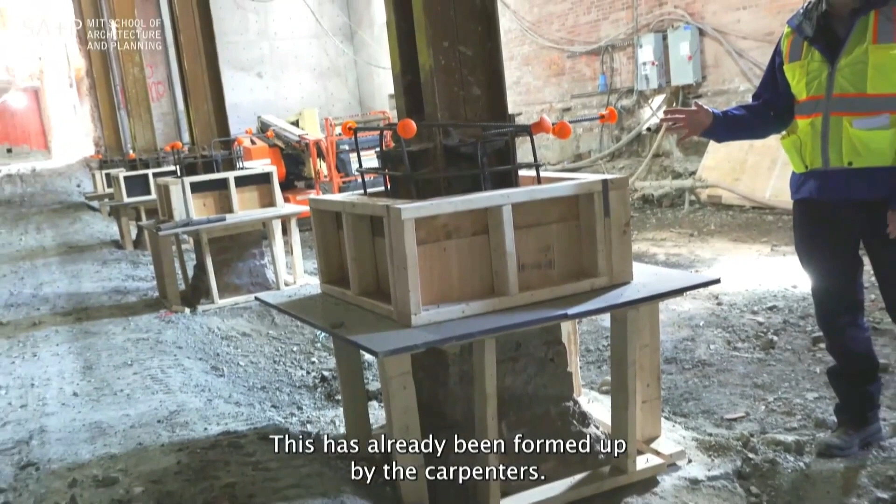Here you can see our detail for the situation where the new floor meets the original column structure. This has already been formed up by the carpenters. On this side, in the corner, you can see a completed pile cap and shear wall. The shear wall formwork was just stripped earlier today, so this is completely fresh.

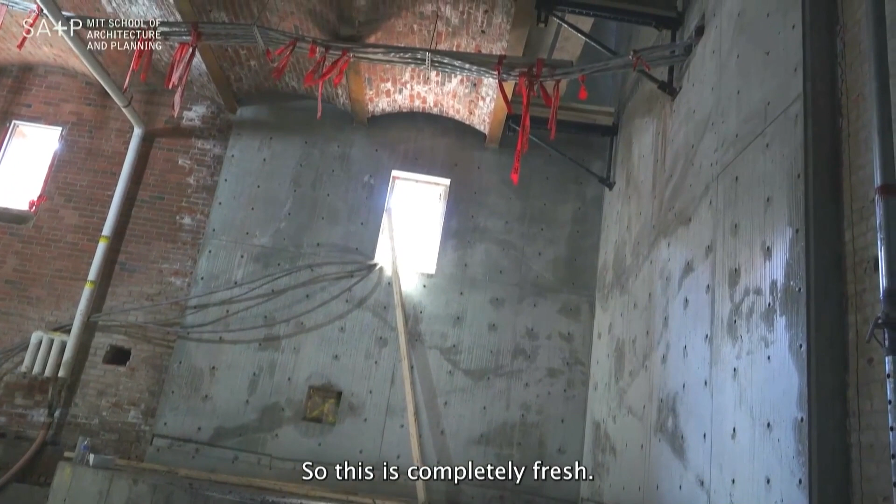That's the update from the site. There's a lot of activity here, as you saw and heard. More to follow through completion. Special thanks to Shawmut Construction for hosting us today, and to all the skilled union tradespeople working on the job.